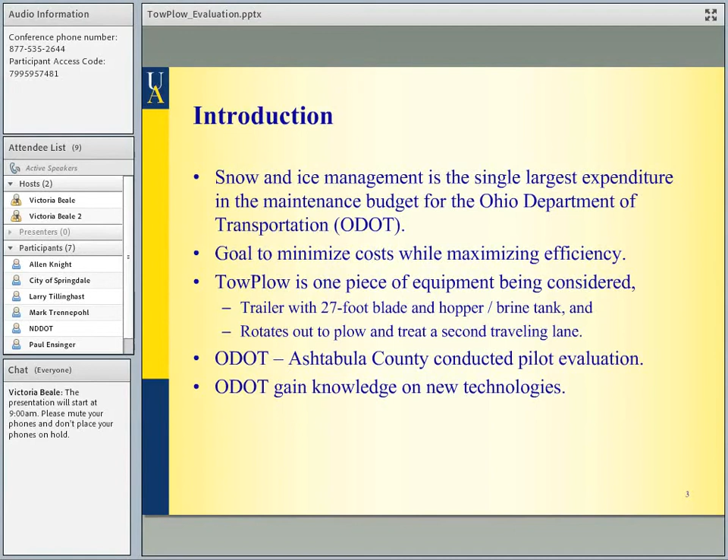Ashtabula County and ODOT had also already had a tow plow, and they did their own pilot study. They really liked it, so they wanted to gain more knowledge on this new technology to see if it should go into other areas throughout the state. So for this project, originally it was for Portage County only, but since Mahoning County had also purchased a tow plow and Ashtabula already had one, we wanted to expand into other areas to gather more data to see what it's like in different areas of the state.

So we compared it to a standard truck. Most of ODOT's standard trucks are either single or tandem axle dump trucks with either 11 or 12-foot plows. There are some 14-foot plows, and some may also have an additional wing plow, which adds an extra 5.5 feet. So for this particular study, the truck on Portage that was opposite of the tow plow was a tandem axle truck with a 14-foot plow and a wing plow. So we really were putting the tow plow up against the kind of biggest, baddest standard truck you can get out onto the road.

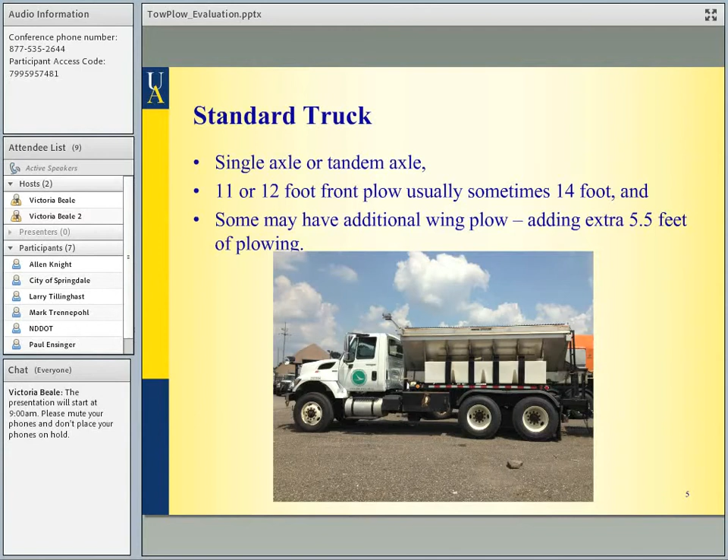So again, here's the comparison. So you can see in the picture one of the wing plows expanded. They only really put the wing plow out into the middle of the lane when they're doing gang plowing like this, due to the fact that it's hard for the public to see and it's a safety hazard.

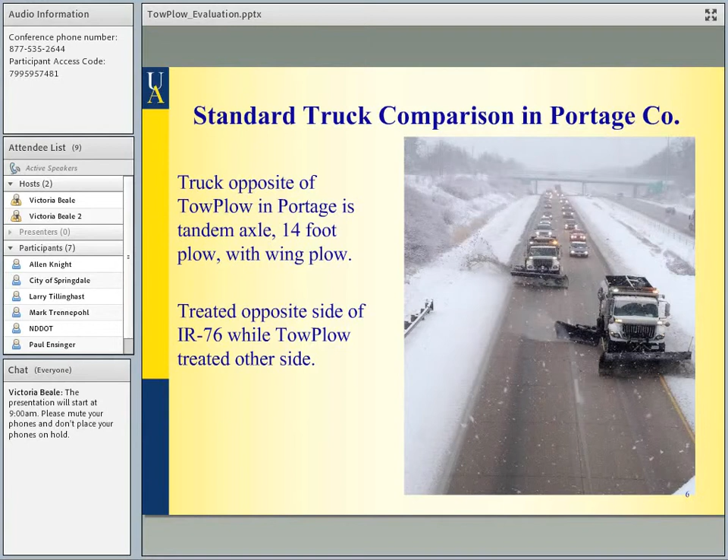So there were 2 sides to Interstate 76 in Portage County. One was treated by one of the trucks, whether that be the standard truck or the tow plow, and the other side was treated by the opposite. They switched throughout the season, which we'll get to when we talk about the Bluetooth nodes.

So it's important to understand what the tow plow system is. This figure can be found on Viking-Cives website, and it kind of just details some of the specs of the tow plow. You need at least a tandem axle truck with a 350 horsepower engine to pull it, or it's recommended, or you might have some issues getting the tow plow up and throughout the various terrain that you have.

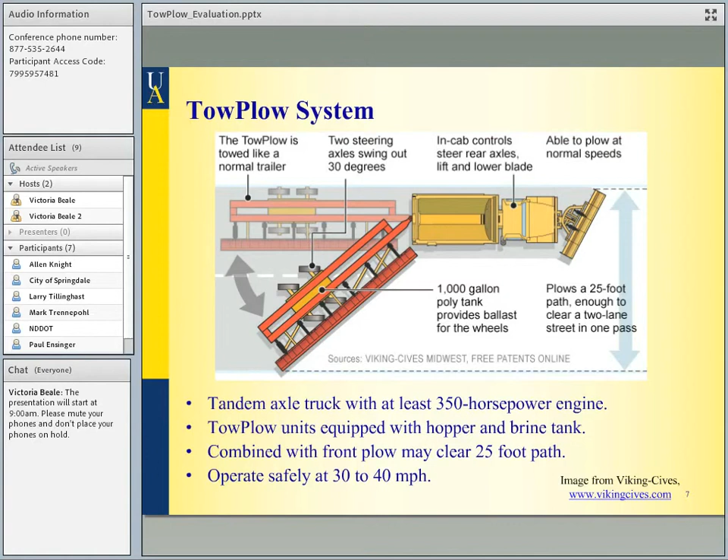The tow plow units that ODOT purchased were equipped with a hopper and a brine tank, but you can do your own kind of configuration, whether you just want brine tanks or whether you want 2 hoppers. It clears a 25-foot path when you're joining it with the tandem axle dump truck, as you can see from the figure, and it operates safely from 30 to 40 miles per hour. In some places, I think they can drive it even faster, but that's what we saw throughout this study.

So when we're collecting data for this project, we looked at 3 various types. We looked at the weather, which consisted of looking at NOAA hourly snowfall data, and then from there we can determine weather severity for each storm event that the trucks were out in.

The next one would be the vehicle speed, so that would be the public's vehicle speeds, the level of service of the highway. So we used a Bluetooth node system along 76 in Portage County to compare the side that the tow plow was treating to the side that the standard truck was treating, and to determine the level of service provided by each one of those trucks in various weather events.

And then we looked at, obviously, the snow plow trucks themselves. The tow plow we equipped with a video system that recorded different angles of the tow plow so we can see how it's being used throughout storm events. And the standard truck was equipped with a GPS AVL unit, and we also verified that information with the 661 forms that the operators fill out during storm events. That was to determine how each truck was utilized.

So when we start with the weather data, we use the NOAA data. It was the one website that provided us with the precision we wanted, which was hourly snowfall data. We didn't want it to be daily or weekly because that wouldn't really help us with this project. So we found remote sensing stations that they have closest to where the tow plows were being deployed, and those are the snowfall data that we used.

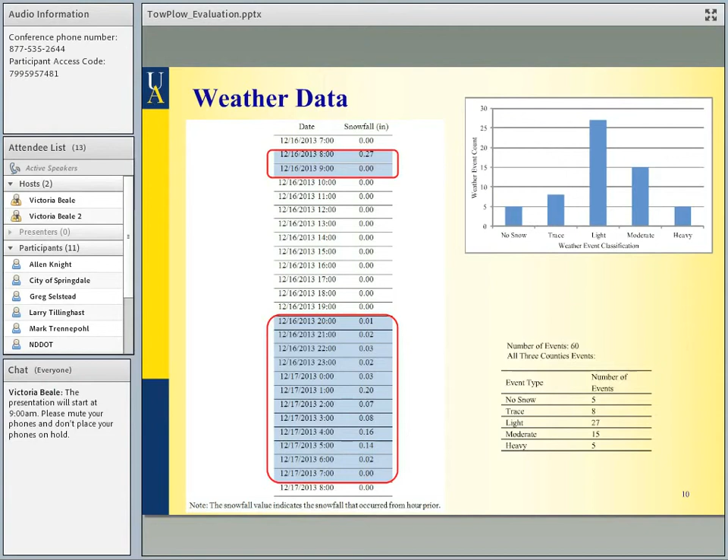You can see from the bar chart on the right, this is our distribution of what kind of events we saw throughout the study. So a high number of light events, and then moderate, and then you get the trace events, and the heavy and the no snow are fairly low. The no snow, like I said, is when they go out and they don't necessarily need to, doing treating or something, making sure it doesn't ice over.

Next, we're going to look at the vehicle delay data. So we wanted to obviously compare the delay that's caused by the tow plow and the standard truck and the level of service on those 2 segments. We used Bluetooth technology. They were placed along 76 in Portage County. You can see here is a list of what the nodes consist of. And they don't pick up, obviously, every vehicle. They're just picking up vehicles that have Bluetooth-enabled devices on them, but it allows us to see the trends of the roadways at various times throughout the events.

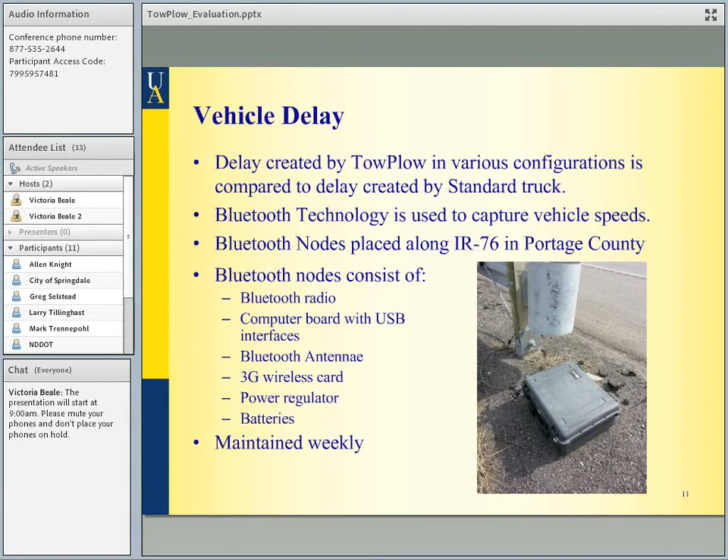And the Bluetooth nodes are placed out in the field. They were placed out the year before also, so we had good baseline data to compare, so we could see what the speeds were during any type of weather. And they are maintained weekly. The batteries need changed out. So here's a little figure of where they were placed and what we're considering the western side and the eastern side of Interstate 76.

So each time a vehicle passes one of these nodes with a Bluetooth-enabled device, it timestamps it, and then from there we can calculate how long. We have a fixed distance between the nodes, and we have the timestamps. We can calculate what the speed of that vehicle is. And we can do that throughout the whole interstate in Portage County. And State Route 44 is kind of the split for the eastern side and the western side.

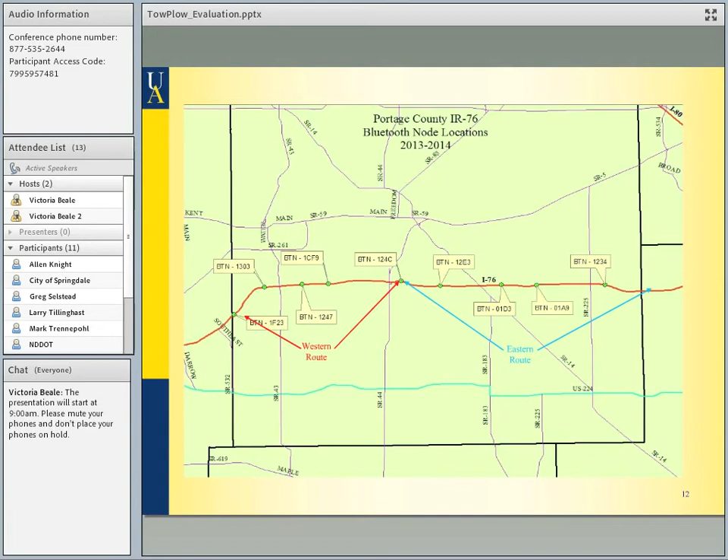So the expected time travel based on the baseline data, the western side was fine using the speed limit of 65 miles an hour as the expected time traveled, whereas the eastern side we did notice that it was slightly higher at 66 miles per hour, so that's what we use to determine that expected value and the delay.

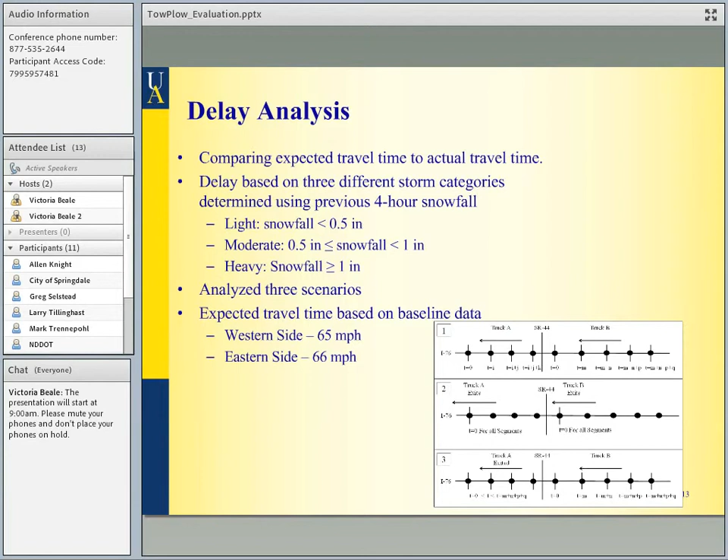This is when the tow plow is treating 2 lanes and the standard truck, but this is a heavy snow event. So you still see the delay, but the standard truck also has somewhat of a delay. And that's just the 0 to 4. Once you get into the 15 to 19 minutes later after treating, they're pretty similar. The immediate delay is higher for the tow plow, but 15 to 20 minutes later, the delays start to become very similar.

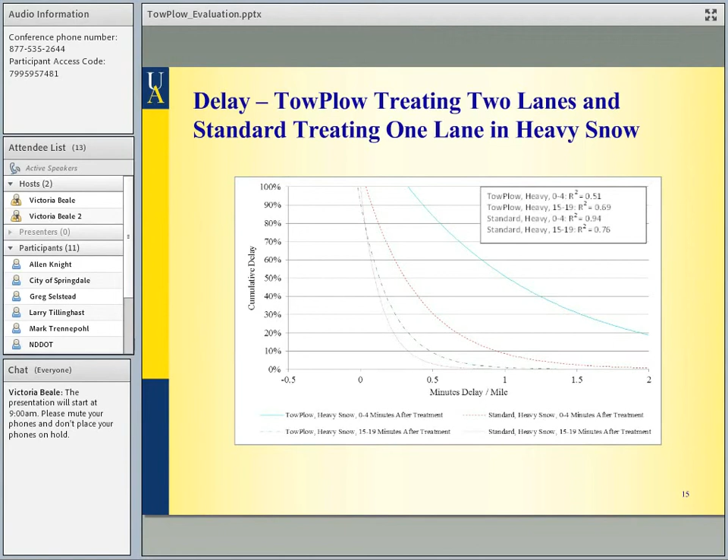And then this is after the trucks exit the highway in heavy snow. You can see that the delays are all very similar, whether it's 0 to 4 minutes after treating or 15 to 20 minutes after treating. So there is higher delay with the tow plow during most storm events, but once they leave the highway during heavy storm events, it's the same, whether it's the tow plow blocking 2 lanes or not. There's more configurations as far as tow plow treating 1 lane and shoulder, and the moderate snowfall delay charts are also available in the report.

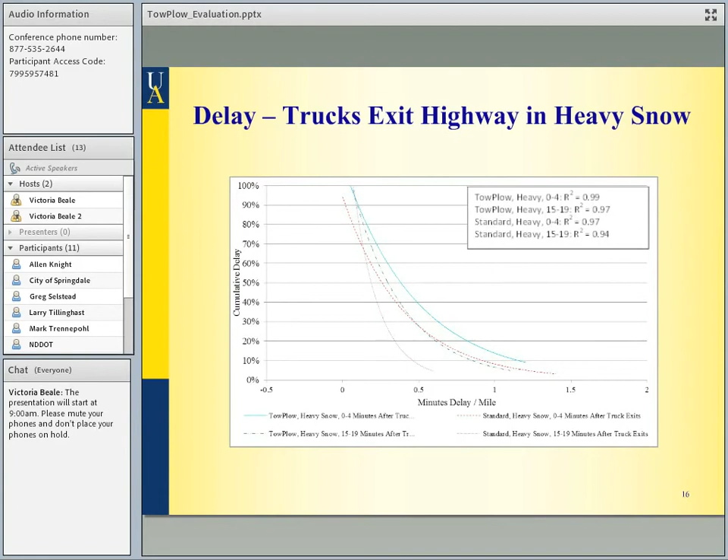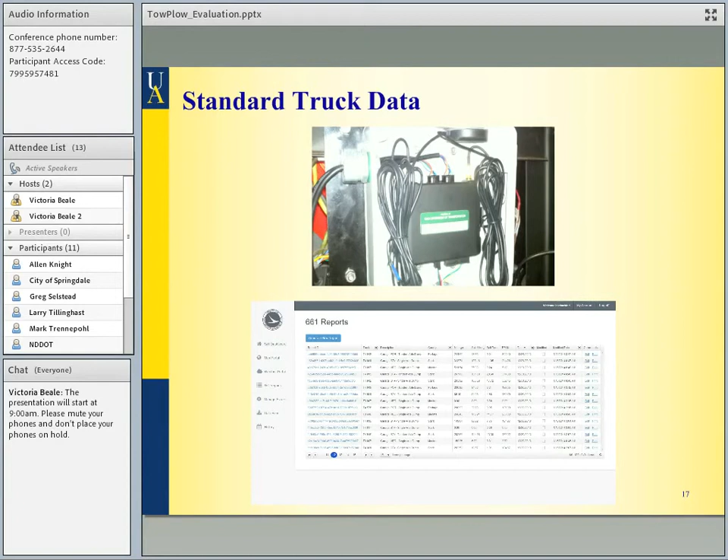So the standard truck data, we said we use the GPS AVL, and you can see a picture of one of the modems and a screenshot of the 661 reports generated from this system. And we use this to determine the utilization of the standard truck during each one of these storm events, so whether they had their plow down or plow up, or whether they were salting or not. And that's all going to play a factor once we get into the cost analysis and the utilization of the trucks during different storm events.

They're meant to be stationary above the passenger side window and at a set angle, but since the tow plow can be deployed at any angle, Ashtabula decided to try it on Mahoning County's when they were doing some different things like upgrading the lights. They decided to make a rack that moved along with the wheel wells, and it actually moves as the tow plow moves out, so you can see exactly where the end of the tow plow is at any angle. And they liked it so much that they ended up making one for their tow plow as well.

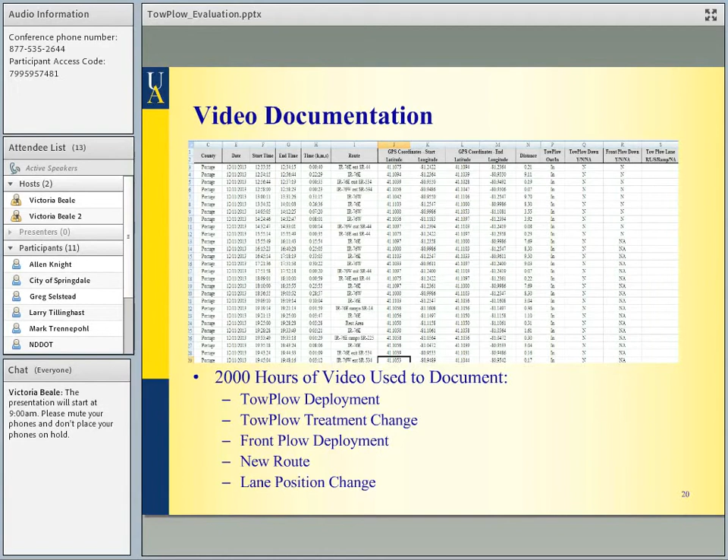Here's a sample of one of the spreadsheets from the video documentation. We probably watched about 2,000 hours worth of video for the 3 trucks throughout the season. Anytime one of the things listed below changed, which is tow plow deployment, tow plow treatment, front plow deployment, a new route or a lane change, a new data line was created. So we basically document what the tow plow is doing at all times throughout the whole season.

When we get into the results of the utilization of the tow plow, I want to make sure everyone understands what we mean by tow plow deployment. So here are some definition pictures. Tow plow deployed is the first one above. The tow plow is swung out at some angle, and it's being used with some kind of treatment, whether it's salting or plowing and salting. You can also see what it looks like in the video data. Below that is when it's not deployed, so it's directly behind the truck. The tow plow could be salting at this point, but we would consider that not being utilized because it doesn't need to be there for them to salt that lane.

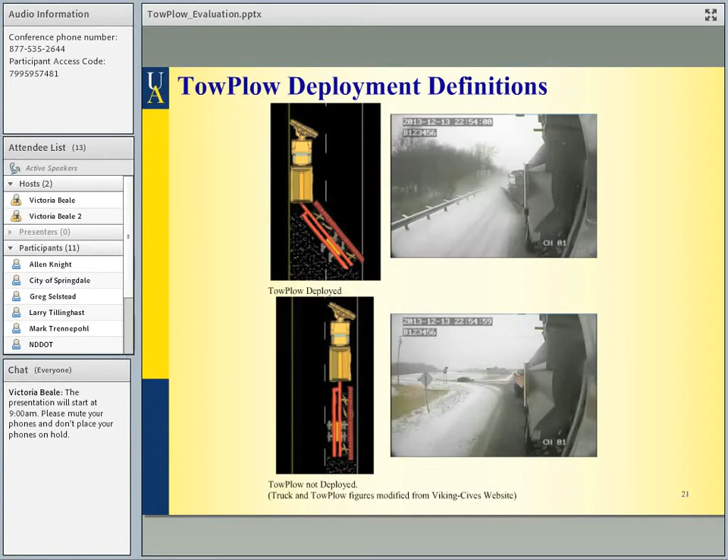Here's the position of the tow plow definition. The top left is the shoulder, where it's pushing back the shoulder. It's pretty obvious in the videos when they're worried about the main line and when they're doing cleanup and worrying about the shoulders. It could be in the right lane, as you can see from the top right and the bottom left. It could be over a little bit into the median to make sure everything gets pushed over, or more so in the right lane, but we would consider both of those right lane deployments. And anytime it's on a ramp, it's a ramp deployment.

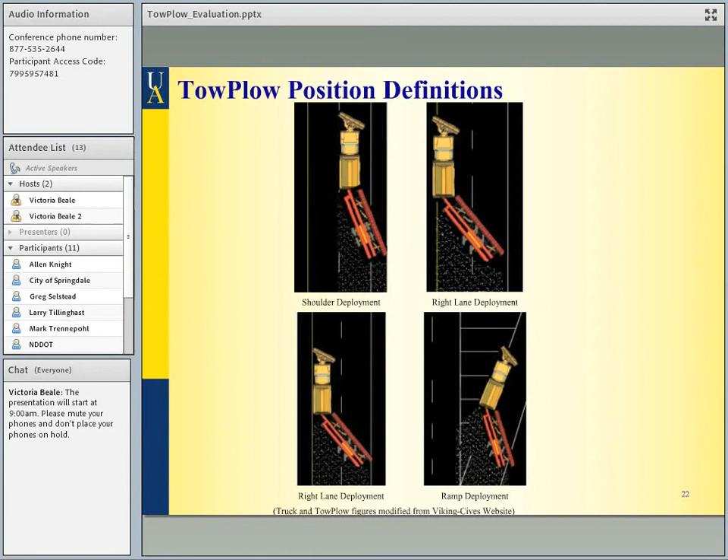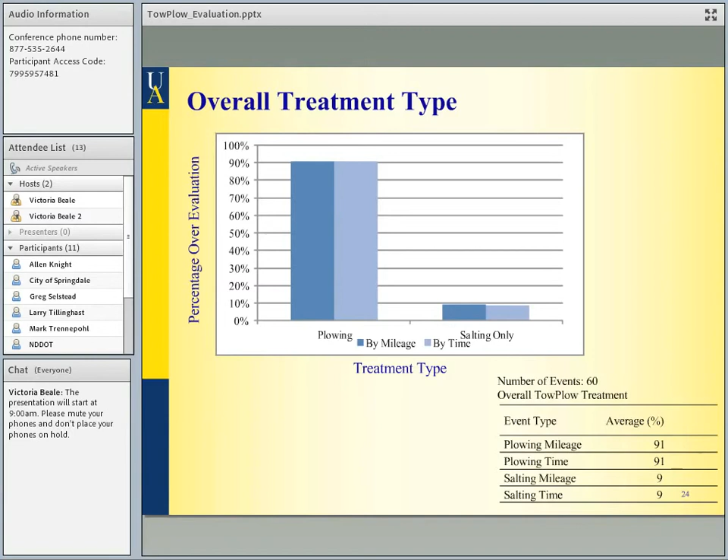So the overall tow plow deployment throughout the season, for all of the counties combined, is broken down by county in the report if you would like to see that. We did it by time and by mileage. By mileage it was 53% deployed and 47% not deployed, and the time was similar at 56 deployed and 44 not deployed. During the times that it was deployed, 91% of the time it was plowing and probably salting, but we have no way to verify that. And 9% of the time it was just being used to salt. That's the way you would want to use it, mostly to plow and salt, not just to salt.

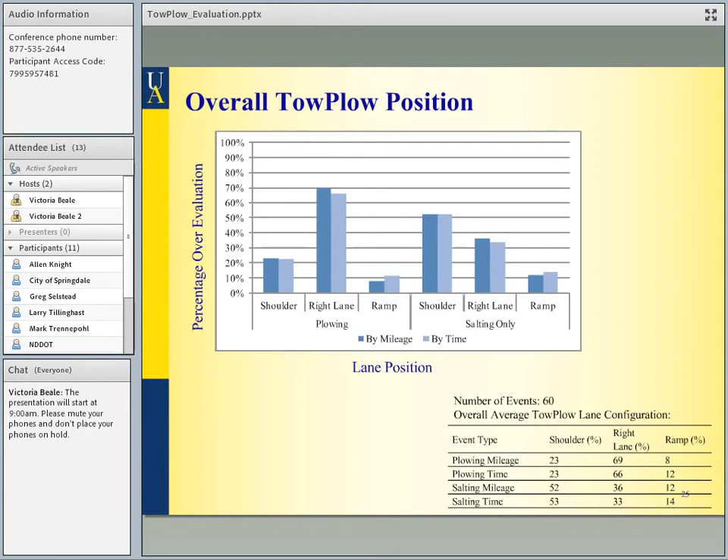So when we get into the cost, we wanted to look at what the annualized cost of the tow plow versus standard truck was. We used a Monte Carlo simulation in MATLAB, which basically you set an average and a standard deviation for the variables used in your equation, and it will run a random number generator as many times as you set to give you an overall average and a distribution of what the results should be.

We used utilization rates for each of the trucks by storm classification. So how much during each one of these storm events, on average, were these trucks being utilized? And then we also determined a tow plow to standard truck equivalency. The tow plow can do what 2 trucks can do. However, it can't always be deployed and doesn't always need to be deployed. Therefore, we know that it's not an exact 2-to-1 ratio. So we wanted to determine, based on our observations through this study on these ODOT routes, what that truck equivalency was. And then obviously we were going to compare them.

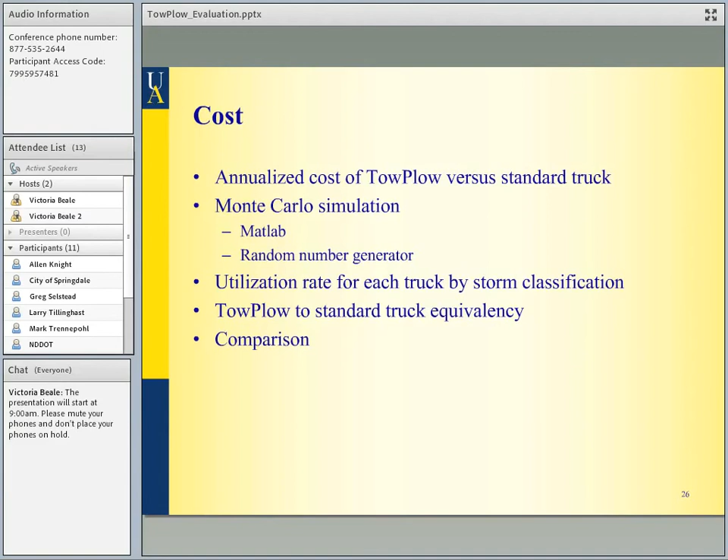So this is a flowchart of the variables that we used when we wanted to look at annualized costs. We wanted to look at annualized capital costs for each one of the pieces of equipment. The annualized factor, we had one set number for those, which was 8 years for the standard truck and 8 years for the truck pulling the tow plow. However, through discussions with ODOT, they believe that we can get 2 truck lives for 1 tow plow. So the annualized factor for the tow plow was set for 16 years life expectancy. And then we looked at what it costs per year.

For the maintenance cost, we looked at parts and labor. We just combined those into what they expected for overall maintenance costs, but that would include parts and labor. When we looked at the operational costs, we did the fuel cost per year and the labor cost per year. For the fuel costs, we obviously look at the price of the fuel, and then the fuel economy for each one of the vehicles when they are treating and when they're not treating. So we used real field data from the 661 reports to determine the average and standard deviation for each one of those variables.

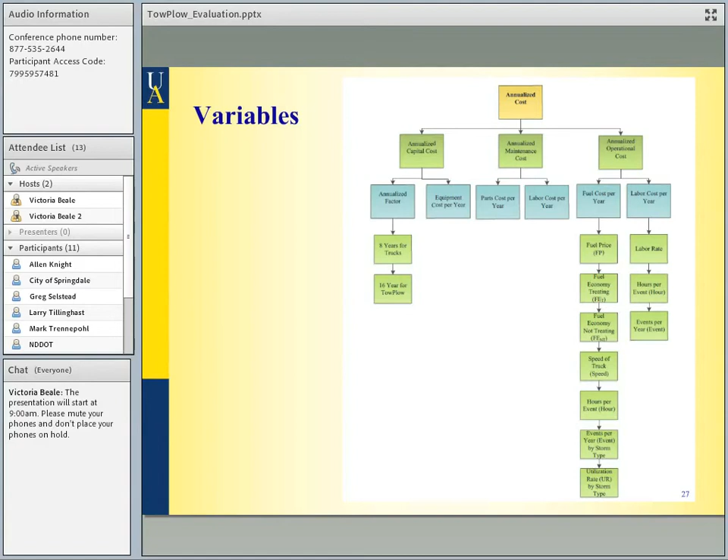Same thing with the speed of the trucks. We looked at if there was a difference between the speed of the tow plow versus standard truck, and when we looked at all the data, we got an average of, I think, 31 miles per hour for both, so we just set it as one. We didn't need to split it into 2 different speeds. And then hours per event, events per year, and a utilization rate per storm type. For the labor cost, just the labor rate, hours per event, and events per year. Basically, if they get called in, whether they're in a standard truck or a tow plow, they're there for their shift. So whether they clear their route faster, they're still there. So that was just set as one thing we didn't need to go into too much detail about for the labor rate.

So when we talk about the utilization rate, we wanted to determine how much they were used during each winter event. When you're looking at the utilization rate for the tow plow, it's basically just the amount of time the tow plow is deployed during an event, divided by the total time it was out during an event, multiplied by 100 to get a percentage.

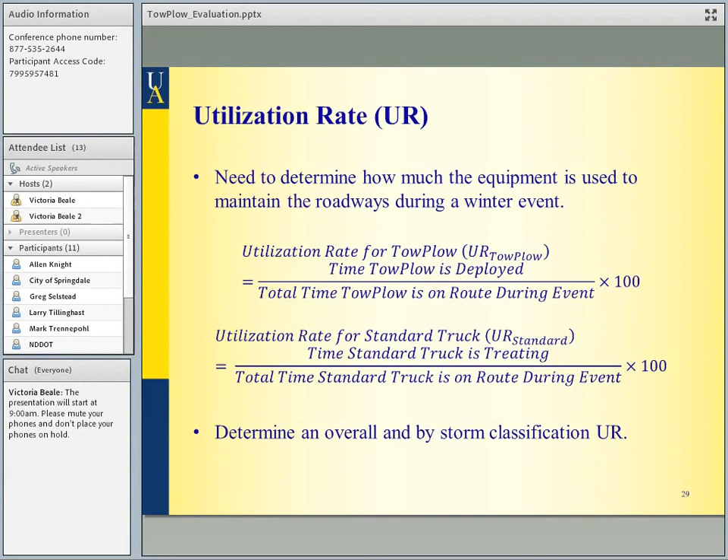For the standard truck, again, we use the GPS AVL verifying with 661 information, so the times that they were saying that they were treating, which includes plowing or salting, over the total time they were on the route during the event. And then this was done for each type of weather classification except no snow. We just looked at trace through heavy. So we looked at it for each snow event, and we looked at it for overall, because we use the overall when we look at the truck equivalency.

So overall, the tow plow is utilized 54% of the time, and the standard truck's utilized 65% of the time. Now that's just the average and would make sense because the tow plow can get their routes done more quickly than a standard truck. When you look at trace events, they're very similar because you maybe don't need the tow plow during a trace event. And then as you get to light event, moderate, heavy, you can see the tow plow gets done more quickly than the standard truck. It takes the standard truck more treating loops to get the route clear versus the tow plow.

So, yes, and we looked at the utilization rates during the hours of the event, not during the cleanup time after, because that can vary dramatically on what the operator is wanting to do as far as cleanup. So we just really looked at during that storm event, which included that extra hour, to determine what the utilization rates were.

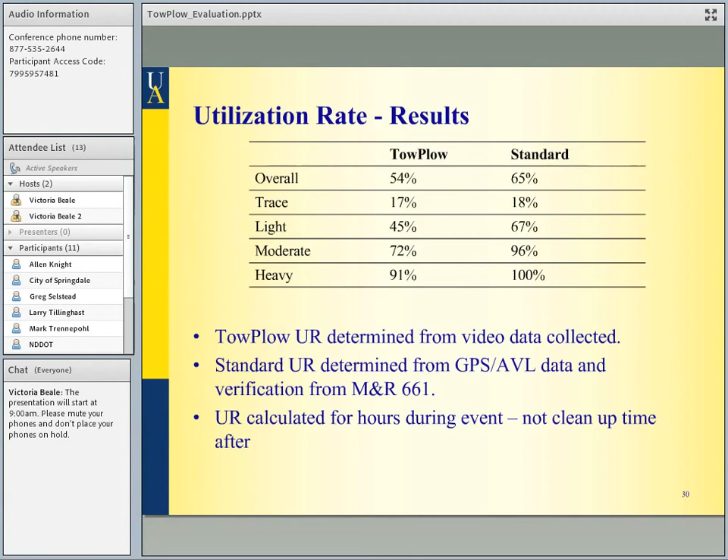When we get into the truck equivalency, again, like I said, it's not the 1-to-2 ratio because it's not always able to be deployed or necessarily needed to be deployed. So when we look at them, we wanted to set our equivalency. Sorry, let me just start over here. So we have the capacity of the tow plow times the utilization of the tow plow times the efficiency of the tow plow, and we want to figure out when they're equal. So we set it equal to the capacity of the standard truck, the utilization rate of the standard truck, the efficiency of the standard truck, times the theta. And the theta will be your equivalent number of standard trucks needed to be equal to the tow plow.

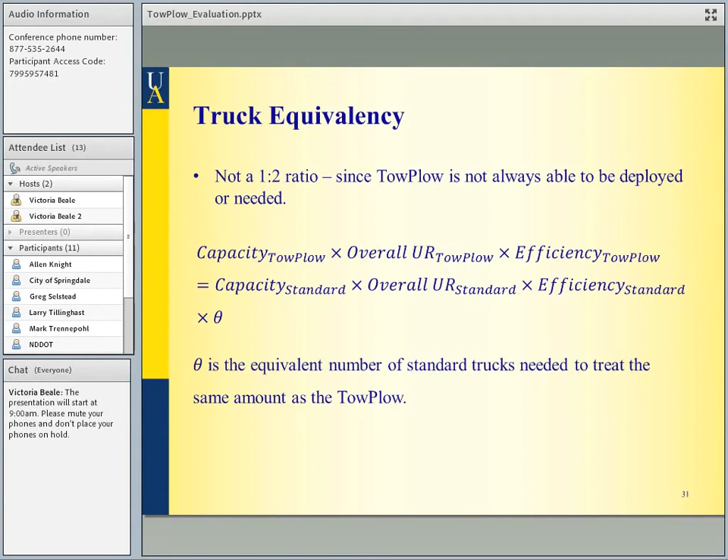So when we're looking at this equation, however, the efficiencies of the tow plow and the standard truck are not something that you can easily gather or collect or determine. So using multiple tow plows and multiple standard trucks, we can use the assumption that those two are considered equal, and those two will drop from the equation. So from here you can see once we drop the efficiencies from the equations, we know that the capacity of the tow plow is 2 lanes. We already just saw the table determining the overall utilization rate of the tow plow, setting that equal to the capacity of the standard truck being 1 lane, the overall utilization of the standard truck, and then from there we can calculate what theta is.

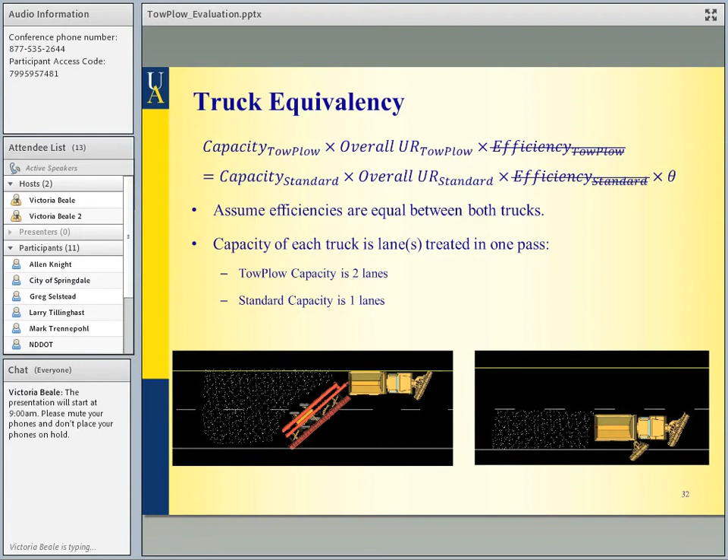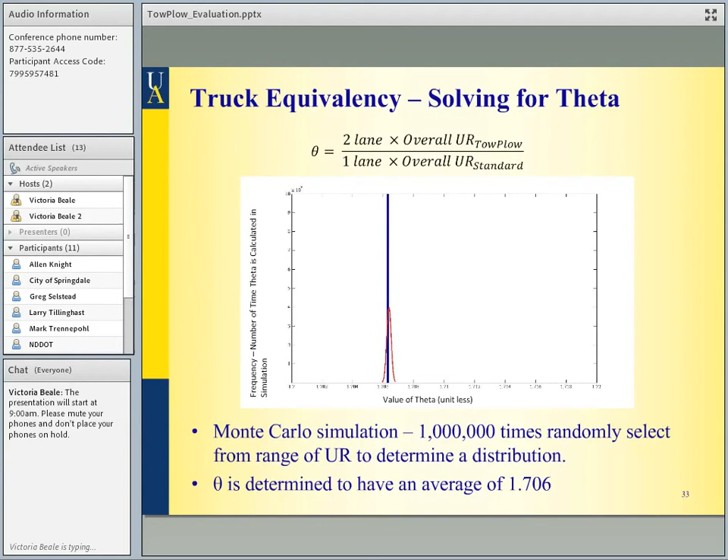We use MATLAB to determine theta, so we ran it in a Monte Carlo simulation again. I think we did it 1,000,000 times and it almost crashed one of the computers, but we did let it run and it came out with an overall theta being 1.706. So from that you can say that, from the observed data from this study, the tow plow was doing the work of 1.7 standard trucks. And this is the distribution. You can see it's a very tight one. So we would consider that a good distribution for this.

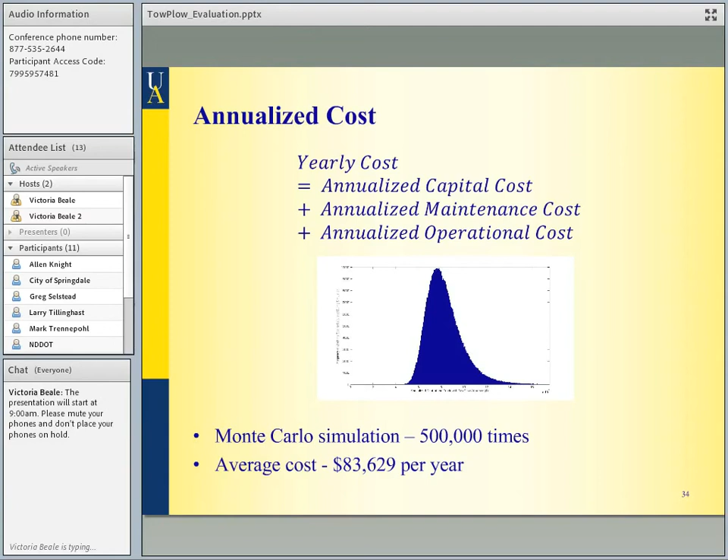And then we get into implementation. So when you're looking at whether or not a tow plow is ideal for your area, it is very important to look at what your current routes are and what your current cycle times are for each of your routes. We didn't want to do necessarily a yes, no. We wanted to make sure that there's a lot of factors that play a role in determining whether a tow plow is going to work out in your area or not.